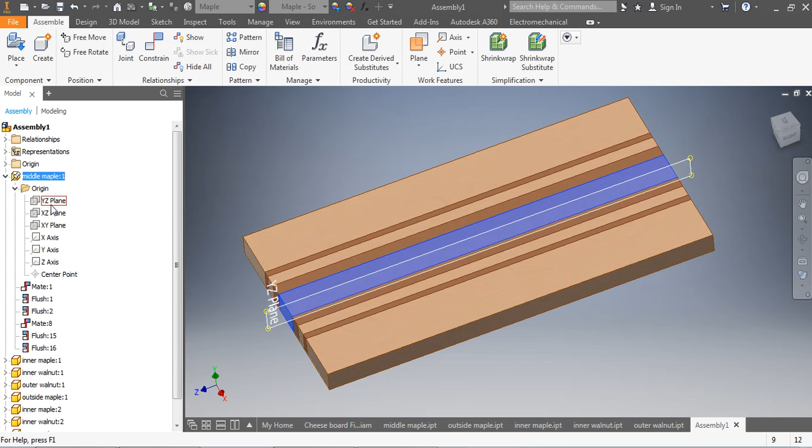So now we got to add that shape. A couple things to start off with. The very middle piece, I'm going to click on it so I can see where it is. I'm going to expand here, go to origin, and turn on the YZ plane, then the XY plane. This is going to give me dead center of the project. There are times where you actually want to work off the dead center of something, so it's important to always have your pieces centered on 0,0 in the center of the piece.

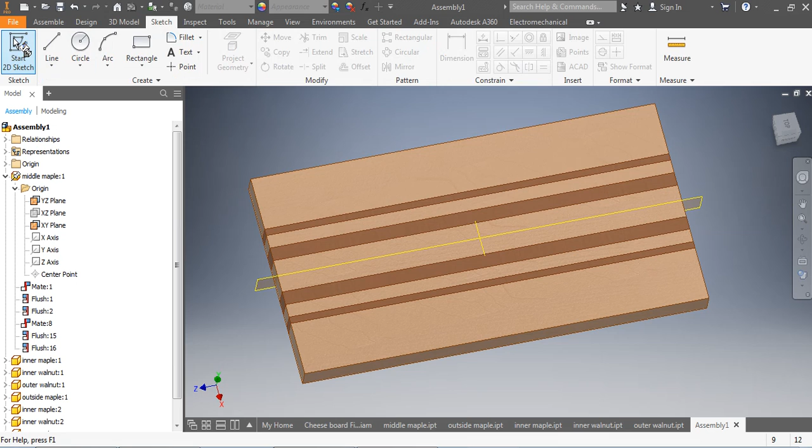Once that's done, the next part is we go over to Sketch at the top. From Sketch, we're going to start a 2D sketch on this piece here, which is the center piece. Now what I got to do before I can do anything is project geometry. If I click a circle right now, there's nowhere to find 0,0 - you can't start from an edge, and it doesn't latch onto an edge.

So what we do is go to project geometry first, and I'm going to put these edges in. Or what I can do is go right to a point and just put the point in - you can see it goes a little plus sign there. The other one I'm going to do is click on this plane and this plane, which locks them in place too. So there's my project geometry. Again, I can do the little crosshairs, or I can do lines, doesn't really matter.

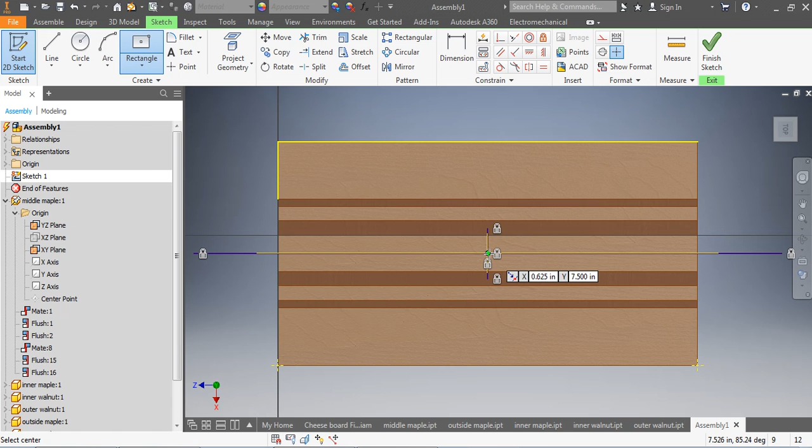So now I'm going to start with a rectangle to start with - a 2-point center rectangle. If I go here, you can see now it goes to green, and I can actually link from the center. Now, that actually isn't going to work for what I want to do, so I'm going to hit escape.

Let's try starting with a circle instead. We're going to add a circle at the very top, and you can see now it highlights in blue, so we actually have some geometry to draw from. I'm going to click on a circle and add a circle here, and I think I'm going to make this one 3 inches to start off with.

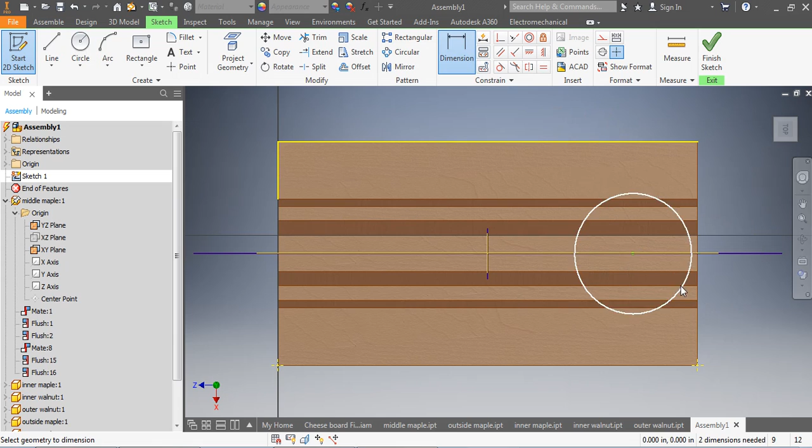Now the next thing is we're going to CNC route this cheese board, and if you CNC route, you got to leave extras around the edges so you don't run into the fences on the CNC router. So I'm going to pick, hopefully from here to this edge - oh, I can't do that one yet. So I'm going to put project geometry, go back to here, and add this one. Now when I go to do a dimension, I should be able to pick from right there.

And I'm going to go right to there, and that's going to want to go from the center. Well, I guess we're going to do a little math - this circle's 3, so that means 1.5 radius, and I want to leave another half inch. So I'm going to make this distance 2 away from the edge, that way the CNC router comes around and it doesn't hit the fence later on. So there's the first part.

Second part now is I'm going to do a rectangle, but I'm not going to go from the center here. I'm actually going to go somewhere down here, and we can move it afterwards.

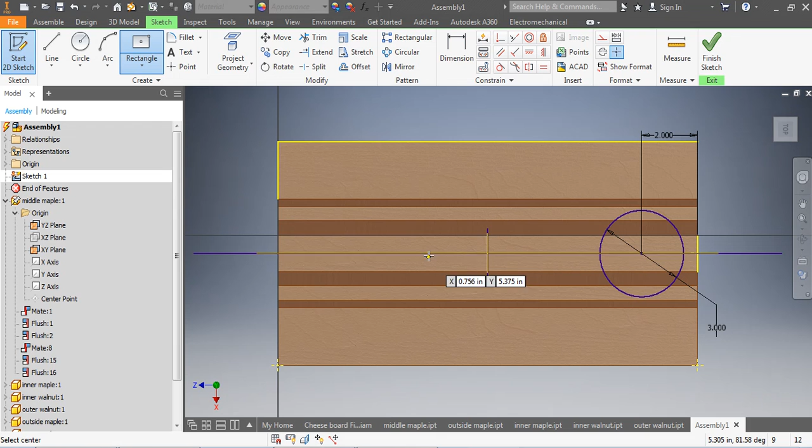I'm going to put this dimension in, from this edge to this edge. I'll set that to 0.5 of an inch. And again, over this edge here to here, I'm going to set that to 0.5. The reality is you can probably get away with like 0.4 or 0.3, but for this tutorial we're going to leave this as 0.5.

So what's our overall dimension? If we measure from here to here, your cheese platter is actually going to be 6.75. Because I've dimensioned here, you can see it's already constrained. When I go to put these dimensions in, I shouldn't have hit cancel. It says adding dimensions will over constrain the sketch, but we can accept it, and it puts that dimension in brackets. So now we've got those dimensions, and our cheese platter shape here.

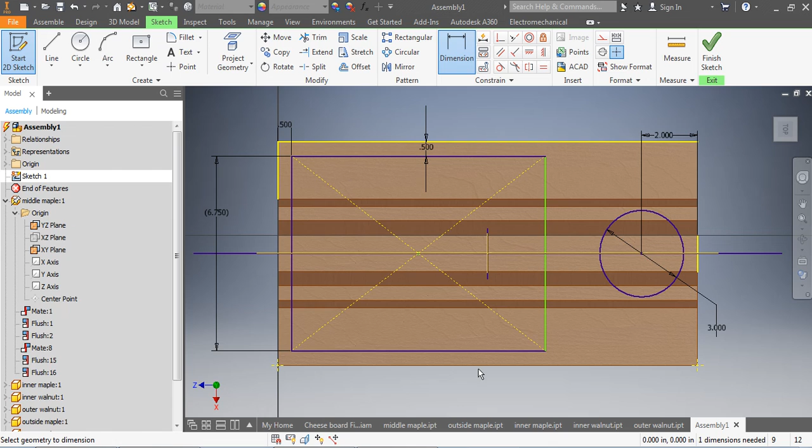If we don't like the distance, later on we can put a dimension from here to here. So we're going to change this maybe to 8, and that'll shorten it up. So we can always change that.

So the next step is filleting. We're going to fillet the corners. I'm going to set the fillet to 1 inch. It's now set to 1, and I'm going to fillet that radius there, and this radius here, and then fillet this corner and this corner as ones.

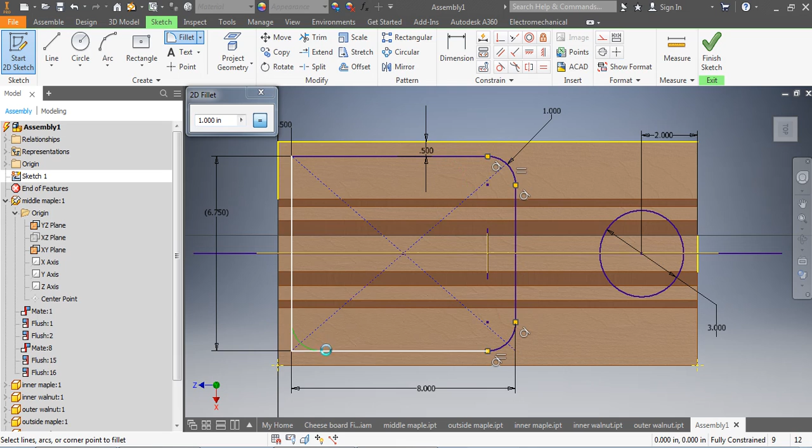So now the last step is to actually add the curve in there. How we do that is we go to circle, and I'm just going to make a circle out here somewhere for right now. I'll dimension it and maybe set that to 4.

So what we're going to do now is make this circle tangent to this circle here and that line. We go to tangent, click the circle, and click right there. Try that again - click the circle and then click on the actual circle here, tangent to there, and this one is going to be tangent to that line.

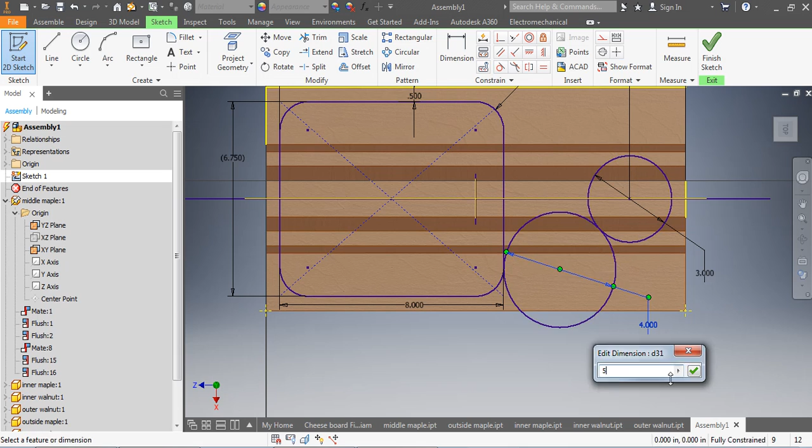Now you can see I have a bit of an arc in there, and they're joined. If I take this number, hit escape, and change this to 5, you can see that circle changes. The problem is it goes off of this line because it's too big of a radius.

So you might have to change and play with this number. I see that one's not going to quite work, maybe it's got to be 4.25. You can zoom in and see it's not quite touching yet. So I'm going to change that one back to 4.

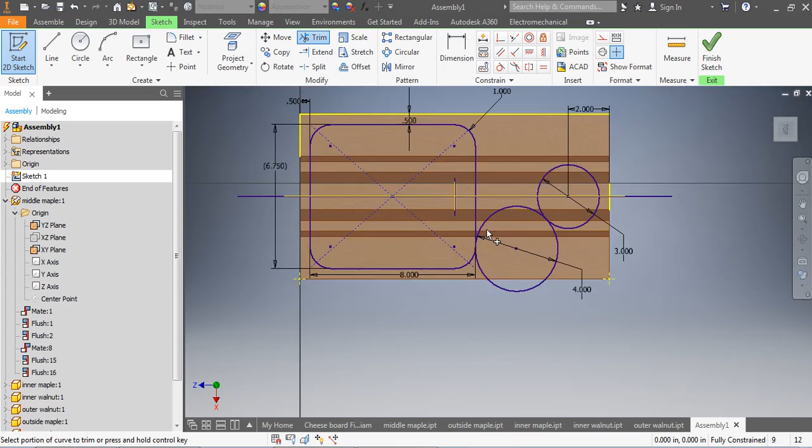That's touching. So now what happens is I can trim - what am I going to trim out? If I trim out that, it trims the whole thing out. Is it touching it there? Oh, it is touching, so I should be able to trim this out. If I do that, it deletes the whole thing.

Interesting. So I'm going to actually stop here because I need to figure something out and I don't want to waste this tutorial. I'm going to delete that, and finish off right here, and continue with the next tutorial. So that concludes this tutorial. I'm going to hit Finish Sketch, and then I'll get back into the sketch in the next tutorial.